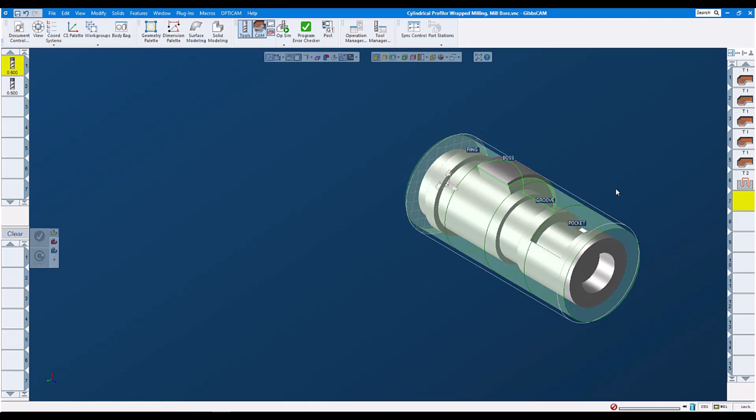For this we are using a 1/2 inch end mill. We are selecting our cylindrical profiler, here we are. We can adjust our profiler to the certain size to cut through features on the part.

Let's have a look at operation number 1. We do our typical settings. An important setting is you have to go into the rotate tab, and we need to be in polar cylindrical milling, and we need to also be in the CX plane.

So we set our feeds and speeds, our cut depths and so on, and then what we do, we select the profile that we want to cut through or use to do the milling. We do a redo, here we are, we have our toolpath. Let's have a look in operation simulation.

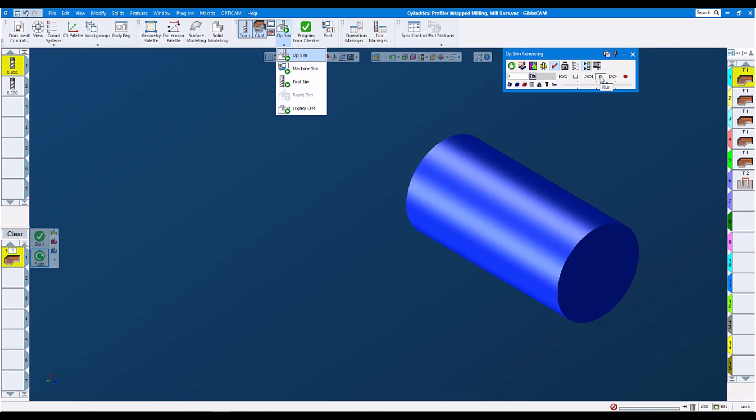And now we see how the tool wraps around the part using the cylindrical profiler.

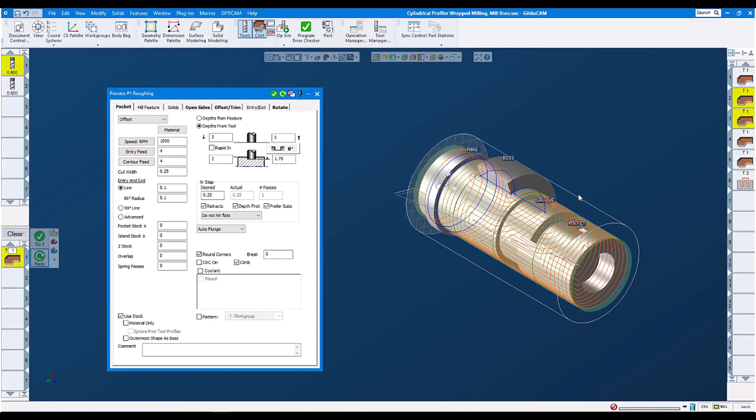Let's look at operation number 2. In this case, we adjusted the profiler to a smaller diameter so we can still cut through that boss with the profiler, but also including those rings over here and there. Let's deselect that. We do redo, and let's have a look in operation sim again.

Now we did the ring on the back side, and we now cut to the further depths down there to machine, still finish the boss and also those rings back there.

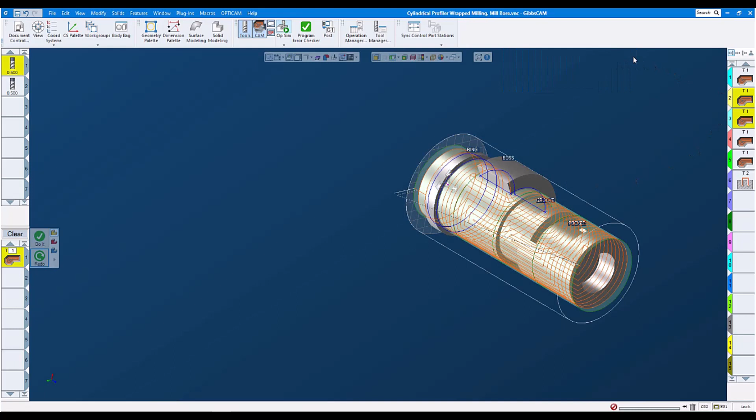Now let's have a look at operation number 4. We're gonna do the milling of the pocket, and again we adjusted the profiler to a different diameter, cutting through that pocket. We select the shape of the pocket.

And have a look at simulation again. Now we're milling the pocket again with the profiler.

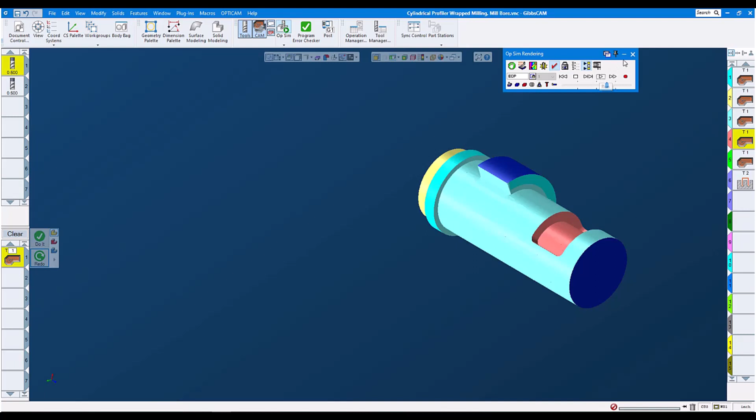And the last thing we're gonna do, we're gonna machine that groove here, selecting that profile ring and that profile ring. We'll redo and operation sim again.

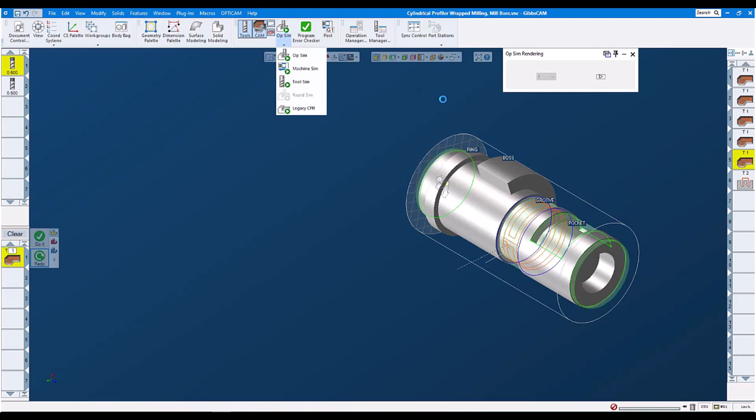Do it, and here we go. We machine now that groove using those 2 circles with the profiler.

This is how we do cylindrical profile wrapped milling in GibbsCAM 2023.